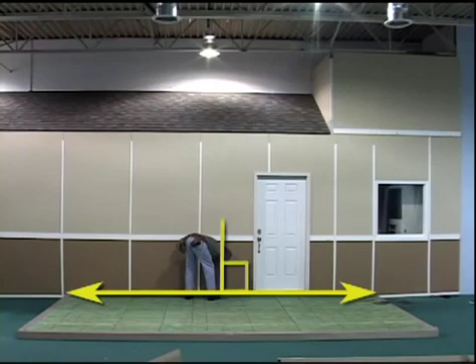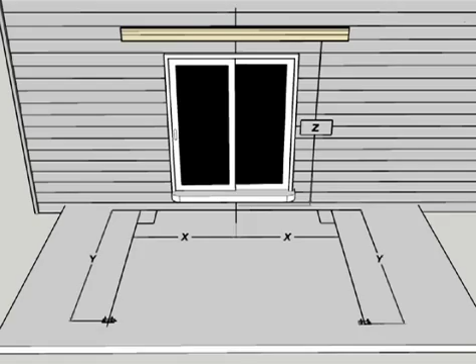Determine the proper hanging rail height. Mark the column shoe locations. Verify that all of the markings are square. Reference the diagram in the included installation guide for measurements specific to your kit.

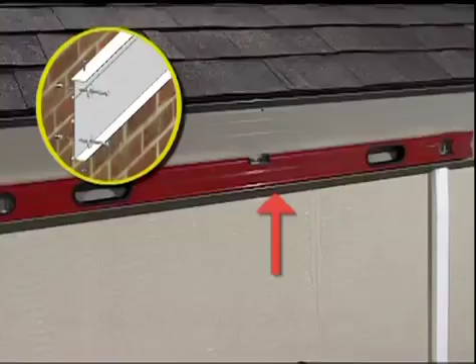Step 2. Hanging rail. Center the hanging rail on the mark. Then attach the hanging rail using a level and the approved fasteners.

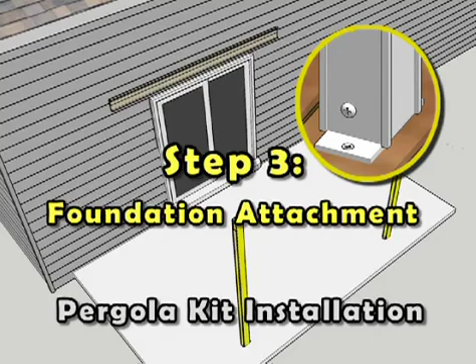Step 3. Foundation attachment. Center the column shoe on the marks using the pre-drilled attachment holes for visual reference. Attach the column shoe to the floor surface with the approved fasteners.

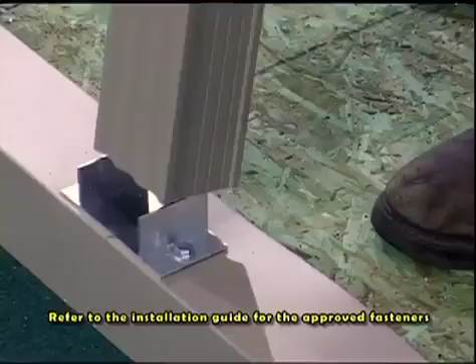Stand the column on the column shoe, level, and attach the column to the shoe with the approved fasteners. Be sure to slide the washer onto the screws before attaching. Cover with the screw caps and repeat until all of the columns are attached.

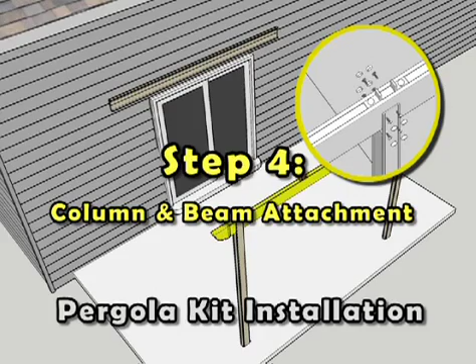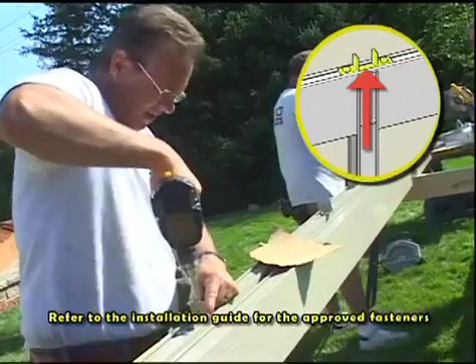Step 4. Column and beam attachment. Line up the pre-drilled holes on the bracket with the predetermined bracket locations on the beam. Attach the rafter to beam brackets on the top side of the beam with the approved fasteners.

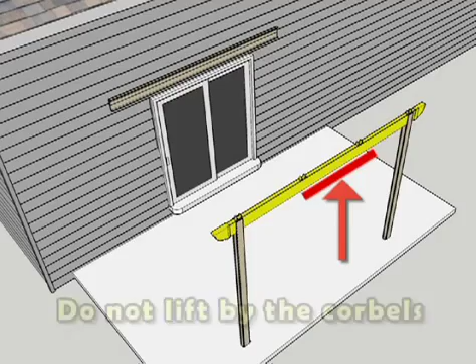Lift and insert the beam into the pre-notched columns, centering the beam in the columns, confirming horizontal level. Be sure to lift under the beam piece only. Lifting from the corbel ends may result in damage.

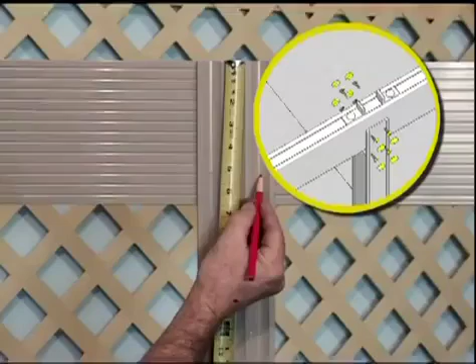Start with the left column, maintaining vertical level. Measure and mark the screw locations on the column for a uniform look. Repeat the marking procedure on both sides of the columns.

Attach the left column to the beam using the approved fasteners. Be sure to slide the washer onto the screws. Cover the screws with screw caps and repeat the attachment process to all of the additional columns.

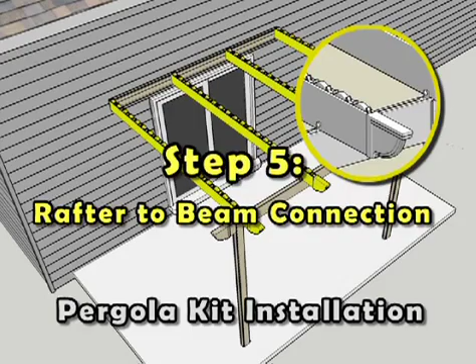Step 5. Rafter to beam connection. Starting with the left rafter, insert the rafter into the hanging rail and align it with the corresponding bracket on the beam. Attach the rafter to the hanging rail with the approved fasteners.

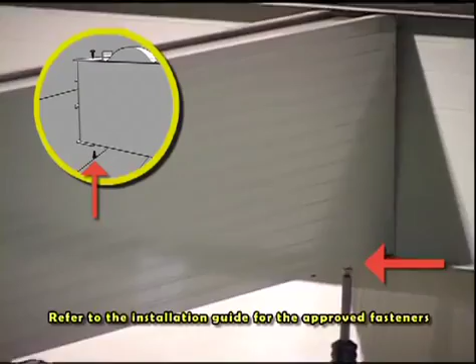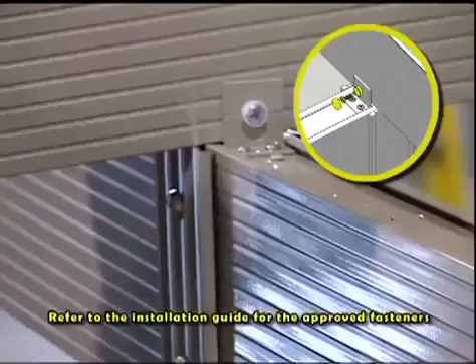Using a level on the left column to ensure the level of the column and beam assembly, attach the rafter to the corresponding rafter to beam bracket with the approved fasteners on both sides. Be sure to slide the washers onto the screws and cover with the screw caps.

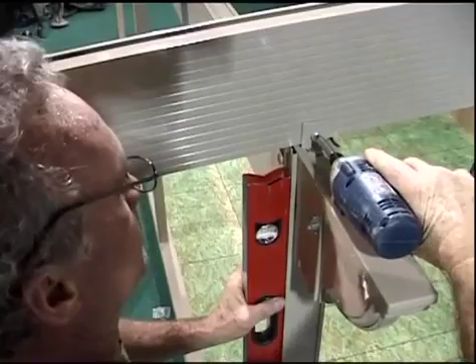Repeat the process to level the column beam assemblies and attach the rafter on the outermost right side. Install the remaining rafters per each specific kit.

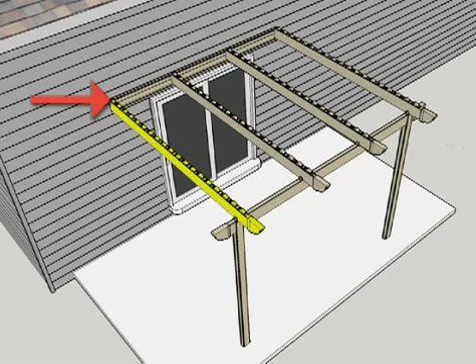Step 6. Crescent lattice installation. Locate and mark the center point of the pre-installed snap lock bracket on the left rafter closest to the structure. Measure and mark 1 foot 6 inches in from the left edge of each lattice piece.

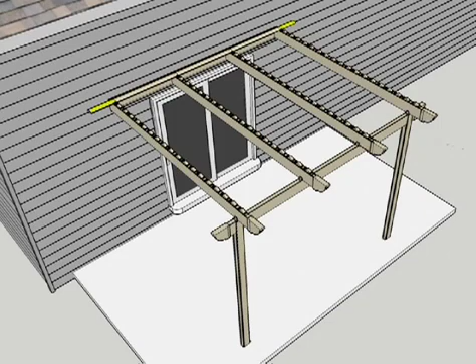Place the lattice on the top of the rafter. Do not lock into place. Align the marked lattice with the center mark of the pre-installed snap lock bracket and check to see if the overhang on both sides of the pergola is equal. If it is not, adjust the proper measurement and mark the remaining lattices accordingly.

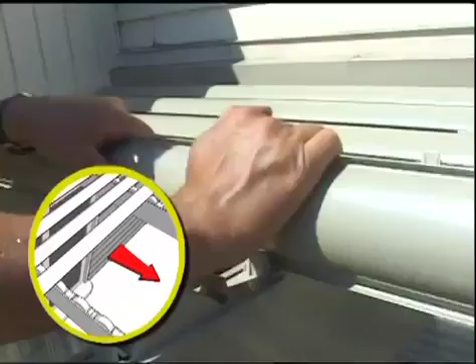Snap the lattice into each snap lock bracket on the top of the rafters. Repeat the process installing the remaining lattice, working away from the structure.

Thank you. This completes the pergola kit installation steps. We hope you found this information helpful, and we know you are going to enjoy your new pergola for years to come.